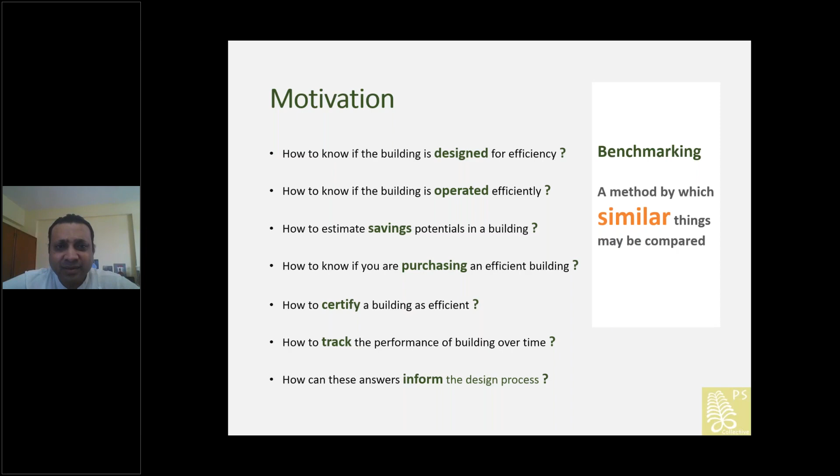And how can answers to some of these questions really inform the design process itself? So go back to the design level and make sure that the building does what it is supposed to do over its lifetime. So benchmarking is a way by which you can compare similar things, and doing that fancy comparison, you'll be able to answer some of these questions.

But the challenge is that all the buildings are very different. Different uses: office, hospitals, hotels, shopping malls; different sizes, different operating hours. Some are 1 shift, 2 shift, 24-hour buildings. A different number of users, different number of beds in hospitals, different number of rooms in a hotel. Varying climatic conditions. Some are naturally ventilated, some are fully conditioned. So the building stock is not a uniform thing.

And the whole idea is, how do we start comparing these heterogeneous kinds of buildings to still make sense and say a hotel with 50 rooms is more efficient than another hotel which is 200 rooms, right? So how do we control for all these varying parameters and still be able to say whether the building is efficient or not, whether it's being operated efficiently or not, and where does the saving potential lie? So that's the challenge.

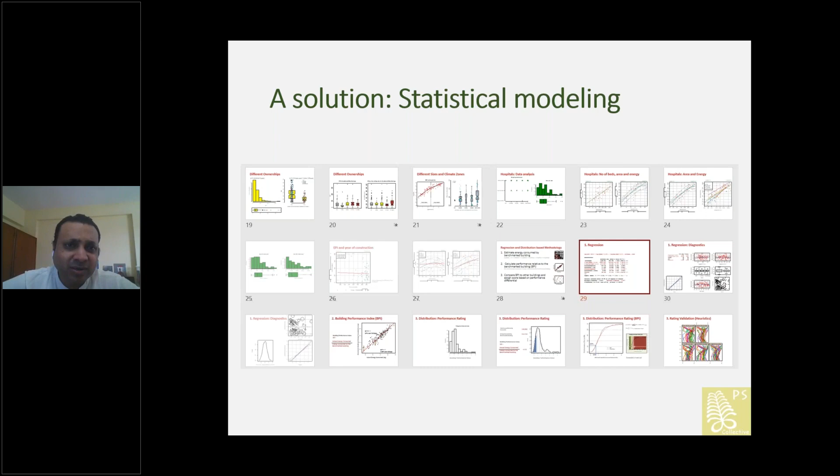So typically you look at all the building parameters, put them in a nice statistical or a technical model, package it in a tool so that it becomes much more user friendly, and then start using this tool to answer some of the questions that I shared earlier. So this is an example of an online tool that was developed for India, for the Bureau of Energy Efficiency. You can enter your building characteristics. It tells you a curve and where you are in terms of a performance spectrum, and doing X, Y, Z would move you up and down this curve, and it gives you a star label at the end of the day in terms of how you're performing.

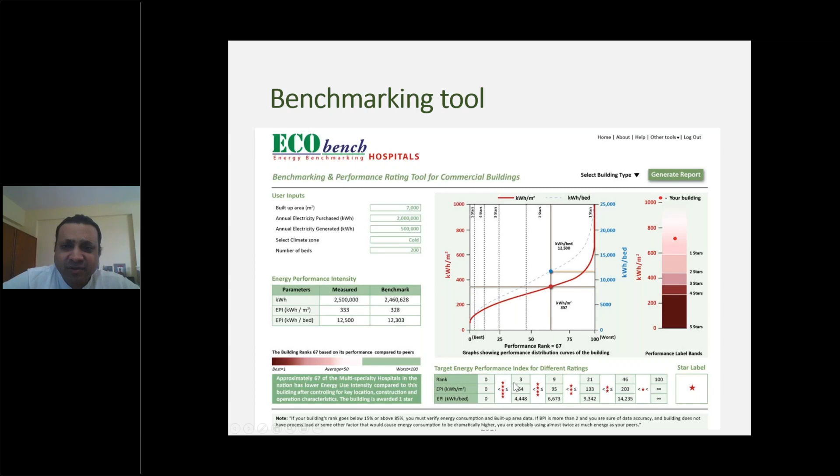There are many ways to benchmark buildings, and again, it depends on why you want to benchmark and what is your objective, whether you want to benchmark the performance using site energy or source energy. And this becomes very important, especially if you are doing a grid interactive building or there's a lot of renewable coming in. You can have scales by which you label the building. It can be technical, statistical. You can benchmark a building against its peers, against itself over time, or against some absolute like net zero, right? You can use different statistical, technical, building physics, expert opinion kinds of models to benchmark.

There's also something called a graduated approach, and this is very applicable, especially in the Indian context where you may not have a lot of data about a lot of buildings. So can you have a graduated approach where you benchmark most of the buildings using some simple metric and commonly available data, but you also have a more complex model which allows you to do some more useful things that I think Carolyn will also talk about later on today.

Then depending on your motivation, you can do a benchmark which benchmarks the assets or benchmarks the operation of a building or benchmarks the entire portfolio. You can do benchmarking for action. You can do benchmarking to track performance. You can do benchmarking to certify the efficiency of the building. You can do benchmarking to do demand side management or fault detection and diagnostics. So depending on what your motive is, what your data set is, you can choose a different approach to benchmarking that is really suited to your context rather than just importing a benchmarking model from somewhere.

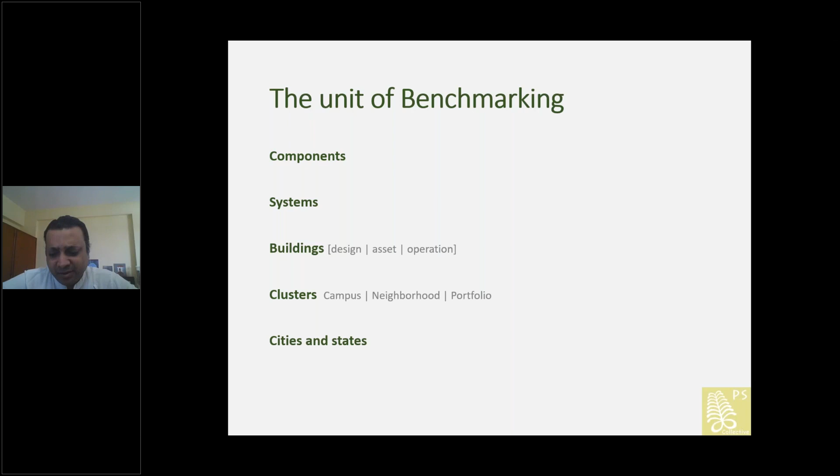So benchmarking can be done at the component level. You can benchmark bulbs and lighting fixtures. You can benchmark systems like the air conditioning systems in a building. You can benchmark the whole building. You can benchmark clusters, so a campus, a neighborhood, and now cities and the building stocks in cities. So benchmarking can happen at multiple scales and with multiple objectives, and a combination of these would help guide you to pick the right benchmarking strategy that will work for you.

So this was an overview of benchmarking. I thought it would help to put things in some perspective for those who are not familiar with benchmarking in general. So next, I will be talking about benchmarking at the city level. How can some of these be deployed at the scale of a city so that the combined benefit is much larger, the whole enterprise is much more scalable, and you can really track the performance of the entire building stock rather than just having a few boutique green buildings scattered here and there, right? So the whole idea is to move from a few buildings to the entire building stock.

And another motivation for doing that is that mostly the energy policies are top down. The national government, the state government says, this is the national energy code, and a directive comes to the city to implement it, right? And at the bottom level, there's capacity constraint, there are implementation challenges, there's a mismatch. So the top-down policies may not always be very easy to implement at a city level.

Of course, they also have high cost of compliance. They are based on intention-based code. So you do A, B, C, D, and the building would perform good on paper. But whether the building is performing well on ground or not is not really covered by those intention-based code. And then, of course, there's information asymmetry in the marketplace. There's no way to really value the energy efficiency in a real estate transaction, and therefore there's not much incentive for developers to invest into it.

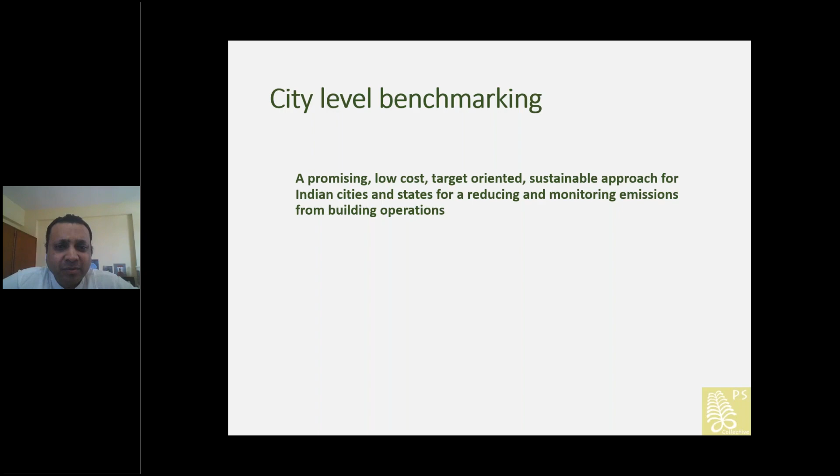So I would stop quickly and say that city level benchmarking is a promising low-cost, target-oriented, sustainable approach for Indian cities and states for reducing and monitoring emissions from building operations, right? Because it allows you to set your own targets, monitor them, plan accordingly, and track, and say over time that you're really improving or not improving, and by how much, and then what needs to be done, simultaneously leading to or supporting a market transformation initiative.

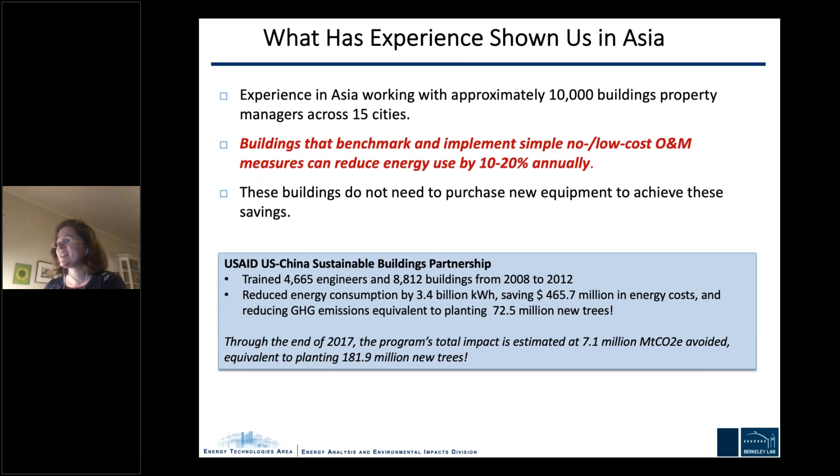So as I mentioned, the US-China Sustainable Buildings Partnership was implemented by USAID in China from about 2008 to 2012. Under that program, we developed for China the first building energy performance benchmarking tool for China, and it was called BEST, Benchmarking and Energy Savings Tool. It was based on the US Energy Star Portfolio Manager benchmarking tool, which I'm sure many of you are familiar with. I know Socket is familiar with this model. It's been used by about half of the US commercial building stock since its inception in the early 2000s.

It's helped organizations save billions in energy costs since 2015 under a larger energy efficiency market transformation program, the Energy Star program. As of the end of 2016, there were 23 local governments in 2 states that used the Portfolio Manager benchmarking system as the foundation of their energy benchmarking and transparency policies.

So Socket also mentioned disclosure programs emerging in India; there are a number of these programs. Currently, there are almost 30 of them in the United States, and many of them rely on Energy Star Portfolio Manager as their go-to performance benchmarking tool. Again, to support regular benchmarking and transparency, disclosure of building energy performance in the marketplace, which helps to incentivize actions on energy efficiency, creates jobs in energy efficiency, and of course drives down energy consumption and greenhouse gas emissions.

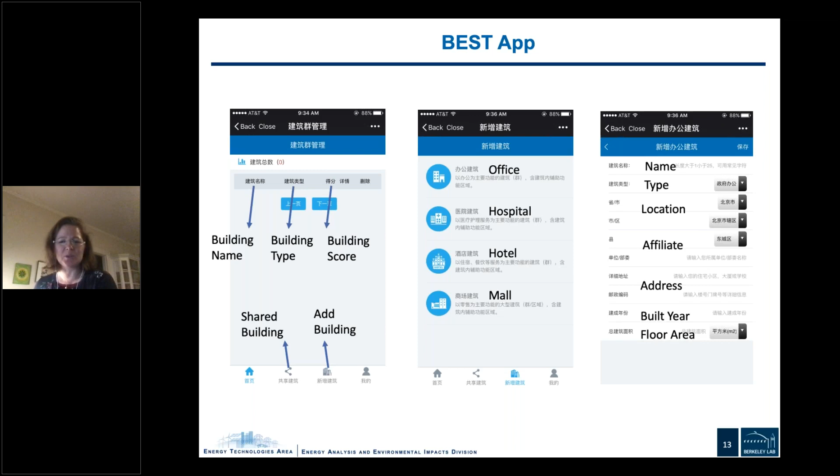Since the BEST tool was launched online, China has also developed an app. So you can see this is sort of in a smartphone size where they contain all of the same data inputs and features as in the web-based tool. So I'll show a few screenshots here. You can see here where monthly energy consumption data is input into the app, and of course, detailed information on the building, the score, and some information on energy use intensity as pertains to that score.

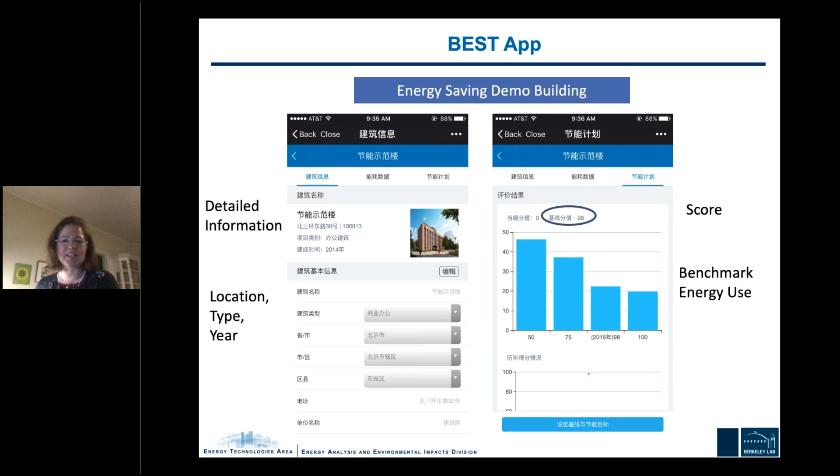Currently, under a US Department of Energy program, we're working with China on what we call Best Plus. So we're working on a tool that's modeled after the Berkeley Lab and Johnson Controls Better tool, which I'll talk about at the end of today's program. And this goes a little bit beyond the Energy Star benchmarking methodology to not only provide a comparison of one building's energy performance against peers, but also to provide guidance on the potential energy cost and greenhouse gas emission reduction for a building or an entire portfolio, and also the energy efficiency actions that should be implemented in the building to capture the energy cost and greenhouse gas emissions reduction potential.

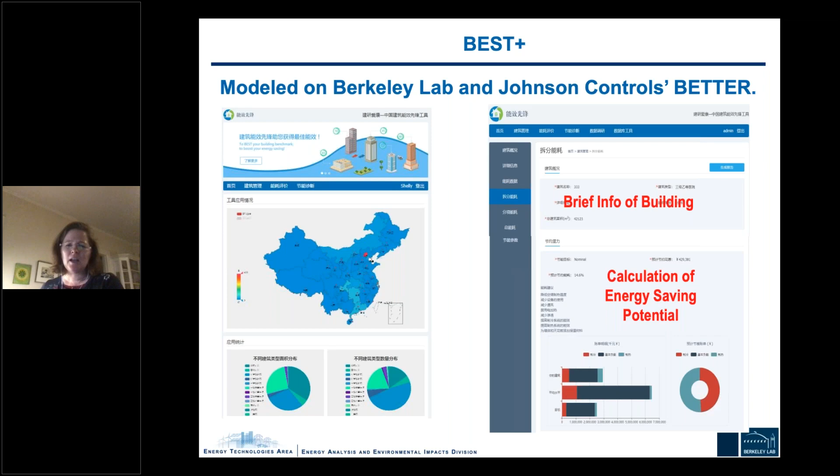So I'm going to just show a few screenshots and then talk more about this when I speak on Better. Essentially, what China has done is taken the source code, which is open, and then used that as their analytical engine and then created this nice interface. But essentially what Better will do is help to create a prediction of the monthly energy consumption in a building, assuming some of the energy efficiency recommendations recommended by the tool are implemented. It'll also provide inverse models or change point models for the fossil and the electric consumption in a building.

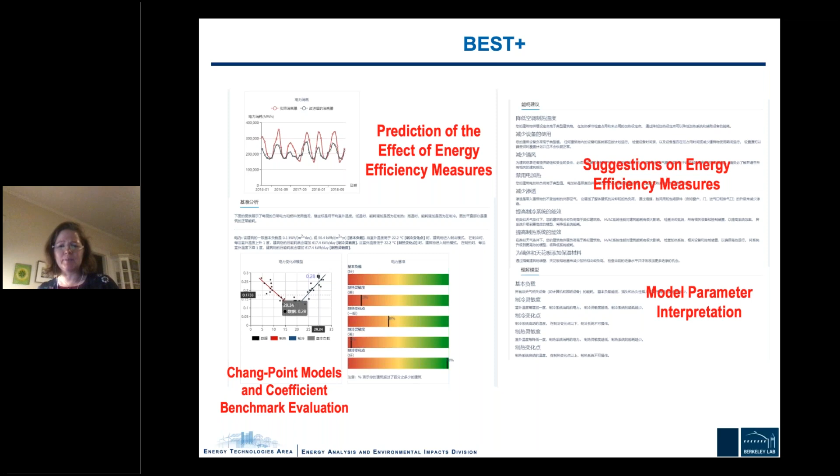It'll isolate and benchmark 5 coefficients of performance within these inverse models: base load, heating and cooling sensitive consumption, heating and cooling change point, and tell you whether a building's base load is good, typical, poor, whether a building's heating change point is good, typical, poor, and so on. And from these inverse models and benchmarks it suggests specific energy efficiency improvements. Most of these are no cost, low cost. They can be implemented immediately by a building management team, so that those savings can be captured. Some will be CapEx, OpEx, and require audits and expenditure. So we've designed the tool to be implemented at many levels and on many budgets.

I'll speak briefly about Indonesia. So as I mentioned, right around 2013 to 2015, I worked on a USAID program in Indonesia called the Energy Efficiency for Clean Development Program. And there again, we took the model of Energy Star and we created a prototype for the Indonesia hotel market, whereby our benchmarking prototype would provide a score 1 to 100, where 75 is performance better than 75% of similar hotels in the market, and would normalize for the key drivers of energy consumption in Indonesian hotels, such as occupancy, weather, size, etc. All those factors outside the owner or manager's control that we need to normalize for in order to do an equitable comparison of energy efficiency.

We converted site to source energy, so we were benchmarking based on source energy. We acquired data through acquisition of large national hotel data sets. We worked with a hotel consultancy called Horwath, and we got building energy consumption data through their annual survey, which was a great undertaking and an example of a public-private partnership working with Horwath.

And of course, Indonesia was able to take this prototype and apply it to support identifications of buildings that might be eligible for their Greenship rating system. And of course, other applications.

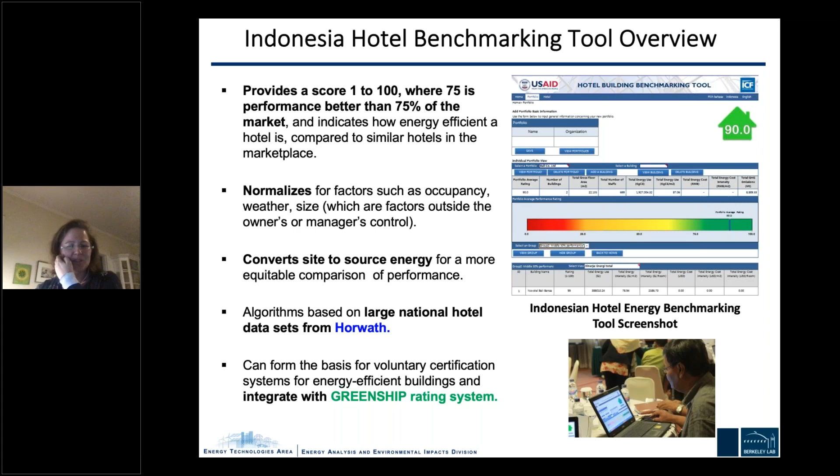We started in the hotel sector in Indonesia because there's so many hotels in Indonesia and they consume a lot of energy, a lot of 5-star hotels. And it was a sector in which data was readily available and there was a lot of energy and cost saving potential. So that ended up being a very successful pilot program.

I'll just talk briefly about China, Shanghai, the Changning district. So while we were developing China's prototype building energy saving tool and the app, and now we're working on BEST Plus, the World Bank was funding a low carbon city initiative in Changning district of Shanghai. So one of 16 districts in Shanghai, mostly commercial buildings. And this district was seeking to be a leader globally in low carbon city and low carbon district.

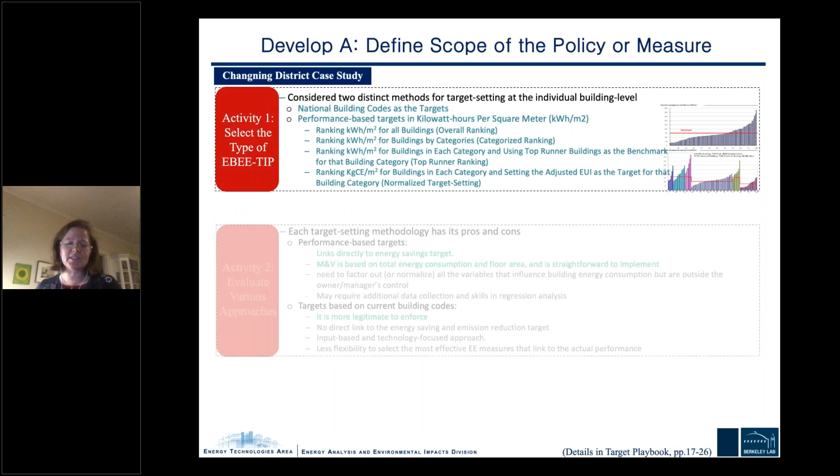So they acquired a grant from the International Bank for Reconstruction and Development and the Global Environment Facility, which allowed them to implement a program to identify and retrofit buildings within the district to be more energy efficient. And so part of what the district needed to do was to determine which buildings were essentially good candidates for retrofits. Where were there energy hogs? Where were those high energy consuming buildings that were likely to drive energy and cost savings and greenhouse gas emission reductions?

So the district looked at a number of different methods for essentially benchmarking in order to determine which subset of buildings they would retrofit. One was to use national building codes as targets. So if buildings were not complying with the national building code, they would be targets for retrofits. Another approach was performance-based targets, where they looked at four methods, just simple kWh per square meter or energy use intensity benchmarks, which we're all familiar with.

They're really easy to implement, but of course they don't factor for those variables such as differences in occupancy or operating hours that affect a building's overall energy consumption, but don't necessarily mean a building is more or less energy efficient than another building. They also experimented with the energy use intensity benchmarking by building categories. So they grouped buildings into subcategories, maybe by type or location, then experimented with using EUI within those subsets.

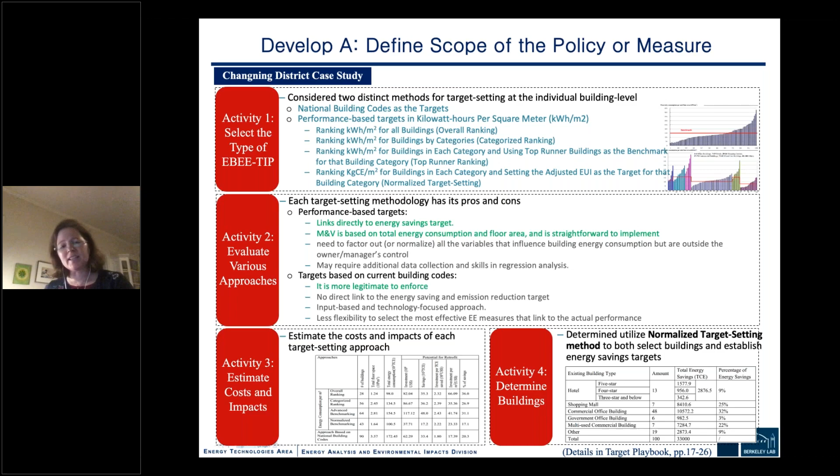What I'll say was the pilot ended up being quite successful. It was a 60-month period pilot, so five years. And they ended up retrofitting 45 existing commercial buildings, about 2.87 million square meters. They saved 31,000 tons of standard coal and reduced their emissions by about 63,285 tons of carbon dioxide emissions. And they were quite good at the outreach, their communications of the savings and the impact. And it's become a very well-documented case study, and WRI BEA has a playbook that includes this in-depth case study on their benchmarking methods and success.

So that brings me to the last piece here, which is BETTER, the Building Efficiency Targeting Tool for Energy Retrofits. This is a new and emerging technology for benchmarking and targeting of retrofits. It's sort of a next generation benchmarking tool. It's developed by Lawrence Berkeley National Lab. It's web-based, it's free, and its source code is available on GitHub. So anyone can download the source code. It's in Python. They can adapt it, redistribute it, what have you, in accordance with our open source software license. So you'll want to check that out.

We designed it to run on the most basic of building energy data. Saket got to that issue around data being the number one barrier to benchmarking. So we've designed a tool that runs on monthly energy usage, utility bills, essentially building size, location, and type. And we automatically regress monthly electricity and fossil fuel usage with the tool against ambient temperatures, and then we benchmark those 5 regression model coefficients that I mentioned for the BETTER tool.

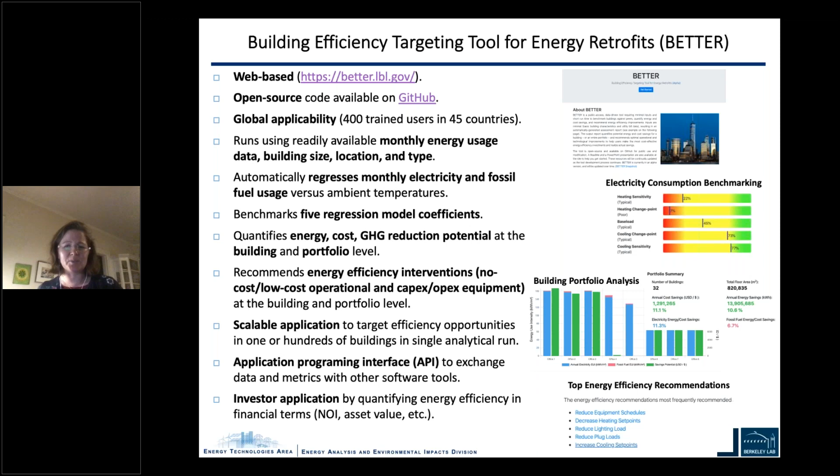We have an API, so for software engineering teams that want to use our application programming interface to exchange data and metrics with us, we can certainly do that, and our algorithms, our metrics can be incorporated into your software tools. Investor application, very, very important. We think there's a real opportunity to use tools such as BETTER to quantify energy efficiency in financial terms, the net operating income increase and the asset value increase through energy efficiency in buildings and portfolios, which can be quite substantial.

So in conclusion, here's some of the benefits of benchmarking. I won't go into these because I know I'm over time. And Saket, I think, hit on many of these, but those are a few case studies from the region, and I'm happy to take questions.

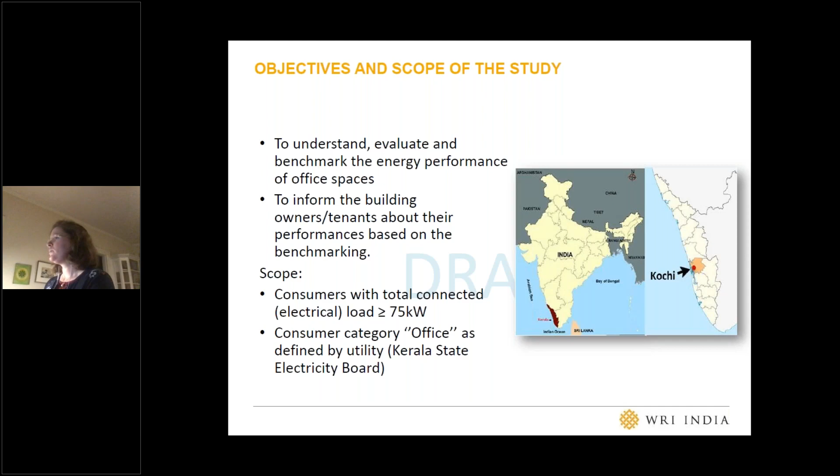So, I will be talking about the energy benchmarking work that we have done in Kochi for office buildings under the Building Efficiency Accelerator program. As a disclaimer, this is an ongoing work, and whatever observations and findings we are presenting here are just interim observations and findings only. So to give you a brief background, I will start with how our engagement with Kochi started. Our engagement with Kochi started in 2018 for developing a zero carbon building roadmap for the city.

So we have identified some near-term, long-term, and mid-term actions for the city to make this transition possible, the zero carbon building transition possible. So energy benchmarking for existing buildings in Kochi was one of those near-term action items. So this was one of the reasons why we have selected Kochi to do this particular work. So that's it about the background why we have selected Kochi.

And I understand that we have people from all over the world joining the presentation. So for those people who are not aware of the geographical location of Kochi, please see where Kochi is. We have given a map over there. So Kochi is a major city in Kerala. So this is where Kochi is located, in the southern end of the country.

Okay, so I'll talk about the objective and the scope of the study to start with. So the objective was to understand, evaluate, and benchmark the energy performance of the office buildings only.

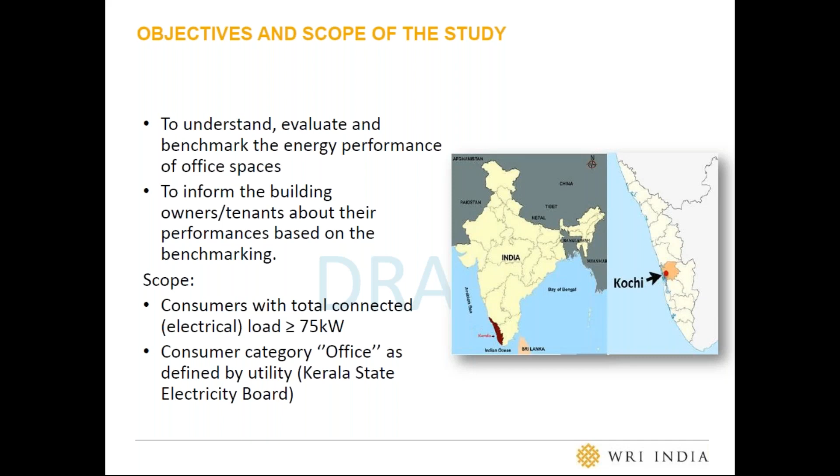So we have only considered consumers with total connected load above 75 kilowatt, and we have only considered those buildings which were reported as office by the utility of the state government, which is Kerala State Electricity Board. So these were the two criteria that we have considered for selecting the buildings for this particular work. Can we go to the next slide, please, Nikhil? Okay.

This is the methodology that we have considered for selecting the sample size of buildings. So based on the two criteria that I have already mentioned, we had 91 buildings identified, and out of that, 62 buildings were selected for the benchmarking. And all these 62 buildings were located across the city, and that was done quite intentionally. We need to justify the geographical representation of these buildings as well.

So for that reason, we have selected 62 buildings from 11 subdivisions of the utility. Out of these 62 buildings, there were different ownerships as well. So as Saket has already mentioned, while we do a building benchmark work, the major challenge would be these buildings will be having different ownership, different category, and we had made sure that we are taking care of those factors as well. Okay, can we go to next slide?

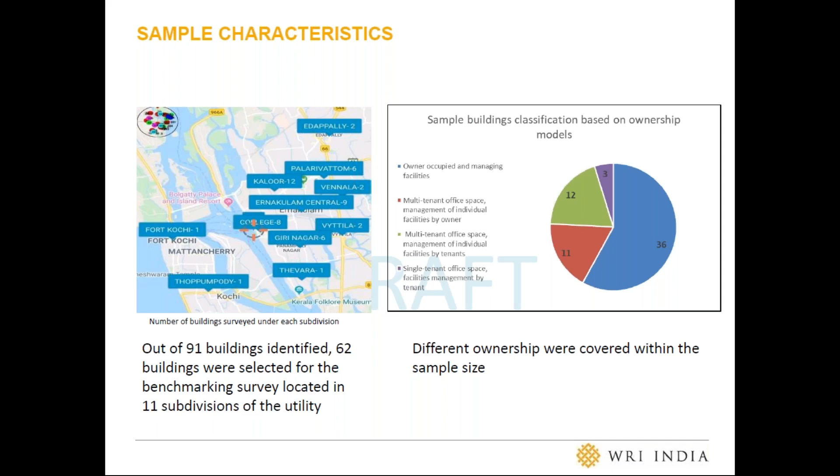So this is the basic methodology that we have followed for doing our work. So there were 6 basic steps which we have followed to perform this work. So I'll talk about the 6 steps. The step 1 was identifying the buildings. I have already mentioned the criteria that we have followed for identifying the buildings. And the second step was data collection. So we have hired a survey agent to perform the survey.

And the step 3 is data analysis. Actually, this step was the major step, and we have consumed a lot of time doing this particular step, because it was very important for us to analyze the data that we have gained and to derive important findings and information from the data that we have had.

So I would like to acknowledge Dr. Saket's contribution in that area. We have been continuously in engagement with Dr. Saket for his guidance to complete this data analysis. Initially, we were using some other software, and we have transformed to R software to do this analysis completely. So all these things happened mainly because of Dr. Saket.

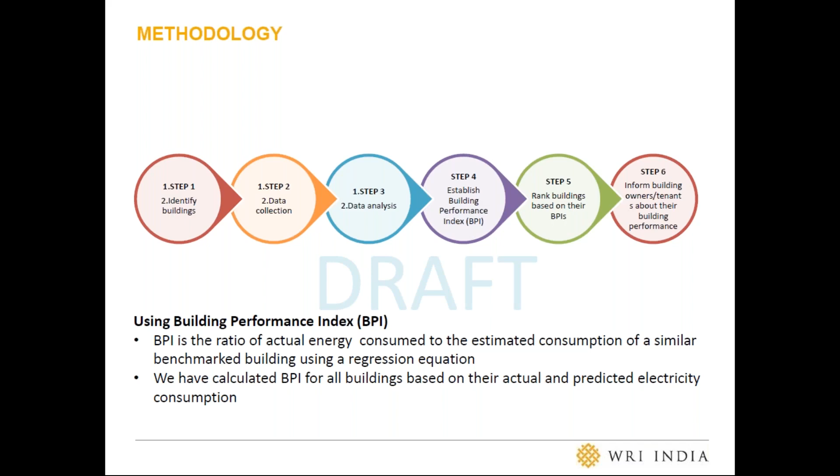BPI stands for building performance index, and it is defined as the ratio of actual energy consumed to the estimated consumption of a similar benchmark building using the regression equation. So after doing the data analysis, we will be having a regression equation which will give us the annual energy consumption of a particular building. That will be common for that particular data set, and we will be using the actual consumption and the consumption that we got from the regression equation to derive this BPI.

Okay, so that is BPI. It's a very important parameter in terms of building benchmarking analysis. We had calculated the BPI for all the buildings based on their actual and predicted electricity consumption for doing this analysis. So next slide, please, Nikhil.

Okay. Yes. So as I have already mentioned, we have used R Studio for the data analysis, statistical analysis and all. As I told before, this data analysis itself was a very time-consuming process, and we had to start with data cleaning, mainly because the buildings that we have surveyed have different characteristics, and it is very important to homogenize the data set, to make sure that all buildings have some sort of similarities in working characteristics. So that's a very important step.

And the next step was to do the bivariate analysis. Bivariate analysis is very important to see how buildings are performing in terms of different parameters. And we have done a breakpoint analysis as well. Then multiple regression, then regression diagnostics. We have performed different diagnostics to see whether the statistical model is good enough, whether we can go with that or not. So all these things were done very closely.

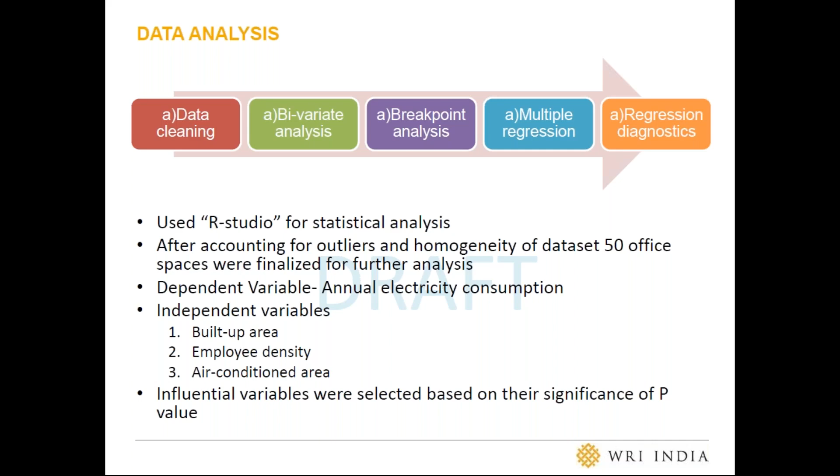Okay, the dependent variable in our case was annual electricity consumption, which we collected from the Kerala State Electricity Board, which is the utility of the state. Next slide, please, Nikhil. So these are the interim findings.

So these are the interim observations that we have had after doing whatever work we have completed so far. 20 buildings were found to have lower electricity consumption than the predicted consumption. So this essentially means that 20 buildings are energy efficient on the basis of the analysis that we have had. The highest ranked building was found to be consuming only 30% of its predicted electricity consumption, and the lowest ranked building is consuming more than 2 times its predicted consumption value. So this indicates the two extremes of building performances in the city.

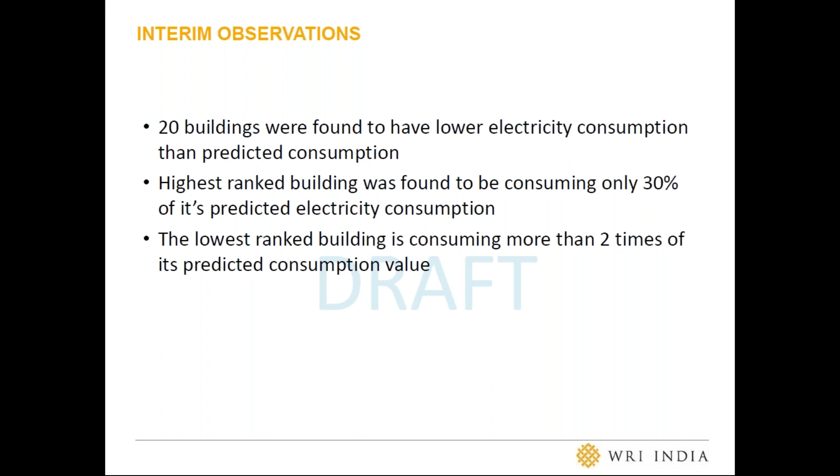So these are the interim observations that we have had so far. This is a glimpse of work that we have done. I have made it very short to make sure that we are sticking to the time. So our future steps: we are planning to write a working paper on this. We will be sharing the detailed findings from this study in a working paper by the end of this year. In the future, we would like to see this coming up at a much larger scale, with more building typologies, with more buildings within the data set. So we are expecting that to happen in the future.

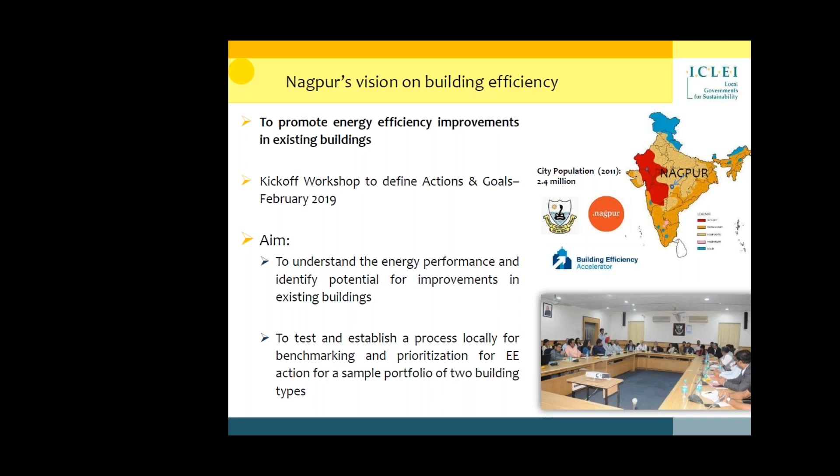Coming to the process and activities for benchmarking. In terms of the selection of the building types, this also has relevance with the city's economy and structure. Nagpur being an administrative center and not really a technology hub as such, and depending on the stakeholder interest, 2 typologies were identified with potential. These were hotels and public buildings. In terms of the benchmarking process, through stakeholder engagement, buildings were selected for the benchmarking survey. These were 10 private hotels and 10 city office buildings.

Then we went through a process of data collection; benchmarking data was gathered, analyzed, and then as a last step in the benchmarking piece, buildings were shortlisted from this sample to undergo detailed audits. This entire process took about a year, including the audits. The detailed energy audits were conducted eventually in 2 public offices and 2 hotels. The detailed audits identified energy efficiency interventions and saving potential, supplemented with cost-benefit analysis. The intent was to demonstrate this process and the benefits and potential to the city government, to decision makers, as well as to other stakeholders involved in this exercise.

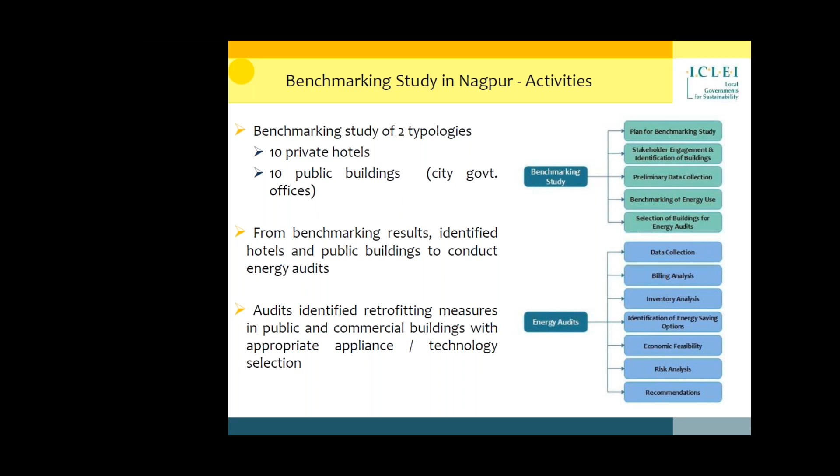Some further information on the benchmarking. The public offices were typically smaller offices, and the hotels were primarily small to mid-size hotels, most of them 3-star rated or below. For benchmarking, data was collected: typical information on electricity consumption, building information such as area, and also supporting contextual information, such as the age of the buildings, connected load, and use of other energy types.

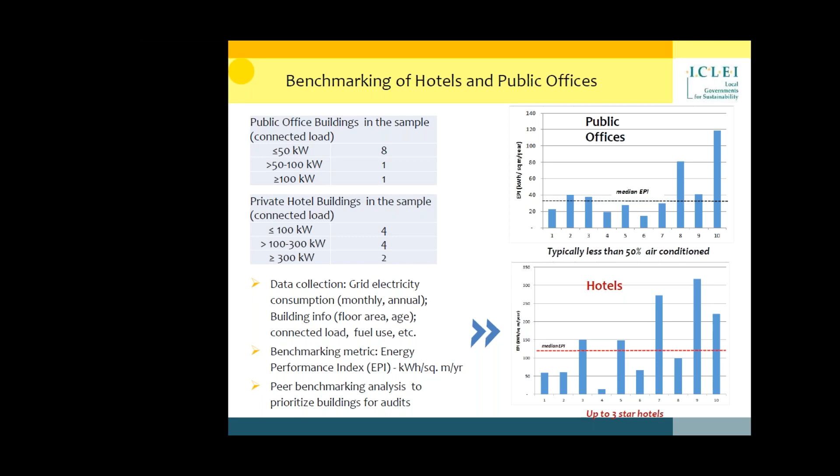Since this was the city's first attempt at benchmarking, and the focus was more on peer benchmarking analysis for prioritization, and given the information available, a simplistic EPI was the metric chosen at the whole building level to undertake the benchmarking. I won't get into the statistical details of the EPI and the charts on the right. A couple of larger findings are there in the subsequent slides. Next slide, please.

So I think everyone has alluded to the data collection, data availability challenges. And I think what we also observed was that logging of energy data was found to be missing in both building types at times. Also, basic building information such as floor area at times was not easily available, even with the city authority for some of its own buildings, given some of these buildings are quite old. So interactions with stakeholders are essential to address such gaps and also to give contextual information, such as operational patterns and so on, to support the numbers and hard data.

In terms of the EPI related observations, the hotel's EPI increases with the hotel size and also the amenities. A few outliers were noticed. For example, one hotel had low EPI but high connected load. So the low EPI was not really a result of its efficiency, but it was more that the hotel had a large area reserved for events, which were intermittent. It was not something that was driving energy consumption, and that's why the hotel had low EPI.

So then there are further aspects such as the number of rooms. Possibly that correlation can be explored for EPI. Since this was the first time that the city was doing it, going forward, the city is going to look at making this more robust and looking at other operations approaches as well.